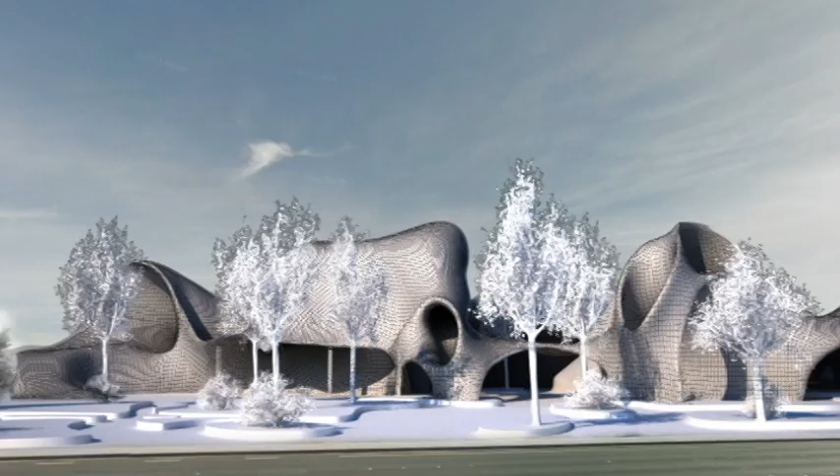Throughout history, architectural advancements have paralleled changing cultural patterns. From the ancient Romans to the 19th century Industrial Revolution, technological advancements and innovative methods of material manipulation have led to new architectural forms. In turn, fabrication processes have been rethought and adapted to such demands.

No longer is the house an engineered reduction of the machine. Factory production is no longer a means to mass-produce standardized components. Now, variation in complexity is just as achievable as repetition.

Society as a whole has departed from the constraints of a single, nearly universal consumption standard and has evolved into the heterogeneous society of the multitude.

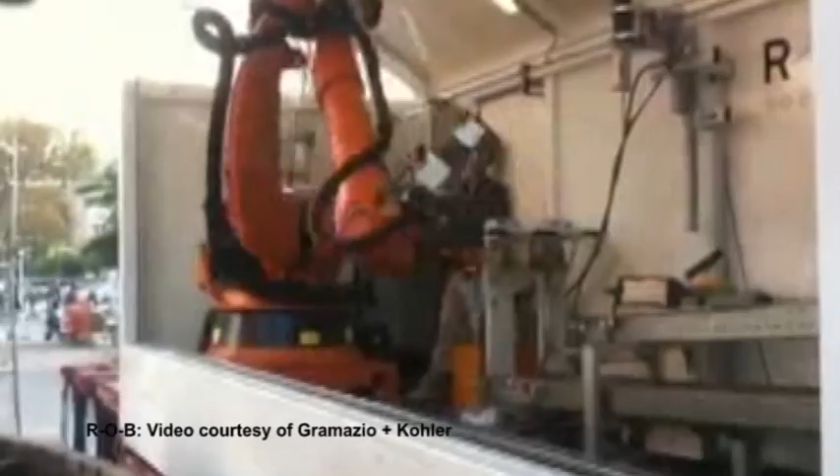Here, design and fabrication are intertwined, whereas design is fabricated and fabrication is designed. The fabrication system is an evolutionary process where form is the formwork.

Differentiation and variation occurs as each panel layer is directly dependent upon the previous one. Digital fabrication offers architects a first-hand experience of gaining explicit control over the fabrication and manufacturing of architecture. Digital fabrication methods make connections between design decisions, material properties, and construction procedures.

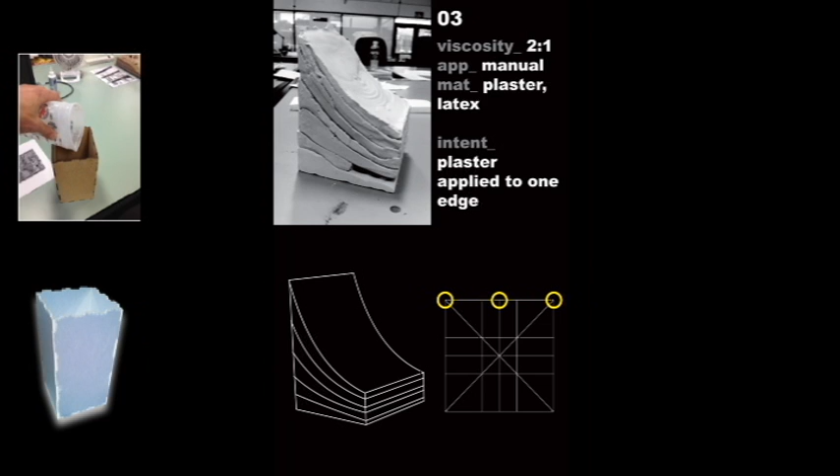Hands-on research through prototyping and evaluation has resulted in a cohesive understanding of material properties, limitations, control, and variables. It is this recursive feedback loop of information, analysis, and reinterpretation that allows emergent behaviors and patterns to become apparent.

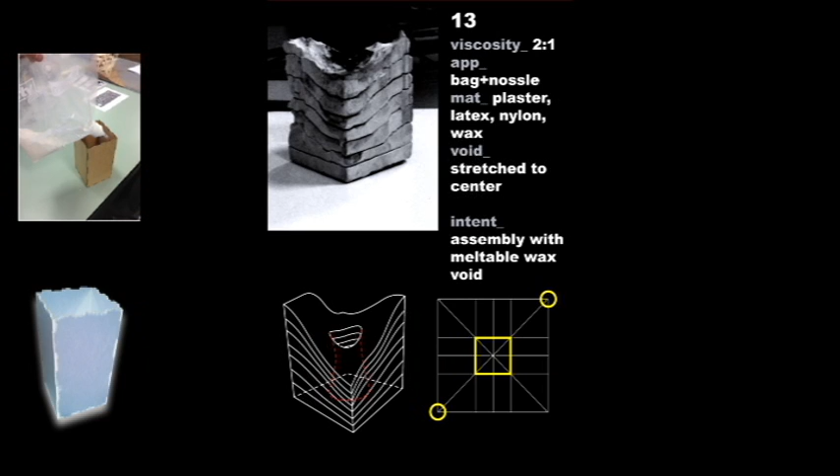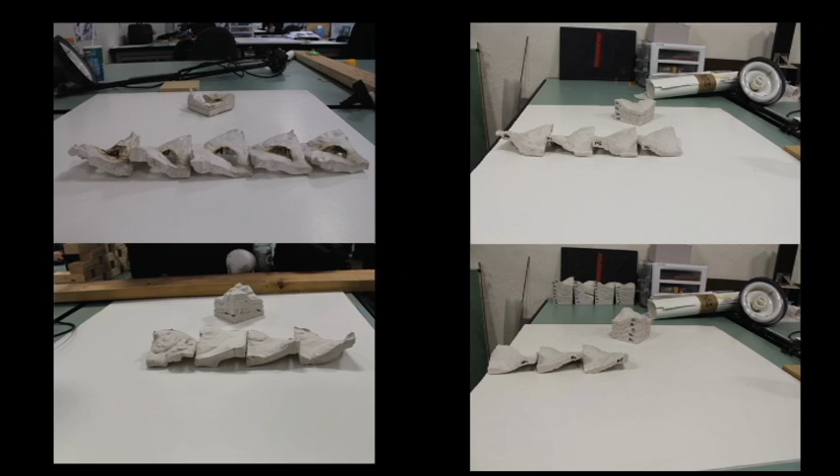A series of geometric investigations reveal the possibilities of connecting successive panels end-to-end for linear assemblages. Prototypes 14, 15, and 18 are assembled in a linear array.

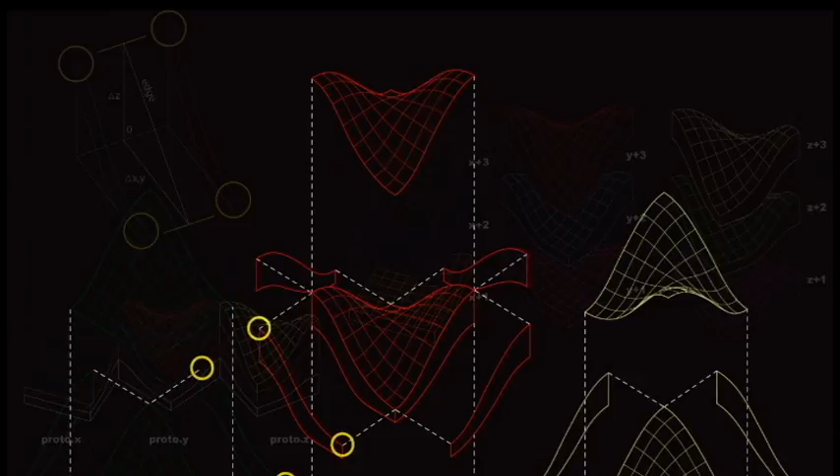Further geometric analysis revealed the specifics of these connections. Distances between shared vertices in the x and y directions are calculated, and the resultant function between the two determines the geometry of a shared edge condition. In order to evaluate this logic, a predetermined surface was reverse engineered into a field of panels.

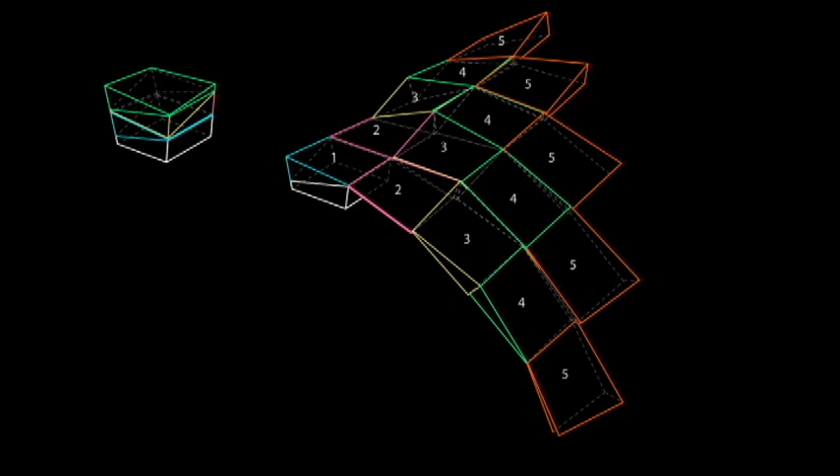Beyond flat surface geometries, the system is capable of creating domes, fully flexible shell structures. Fifteen identical formworks were uniquely etched and cataloged for casting and assembly purposes.

The resultant form demonstrates three-dimensional flexibility. As the S-shape bends in the X and Y direction, the form also tapers inward and outward at the top and bottom, allowing for a self-supportive shell.

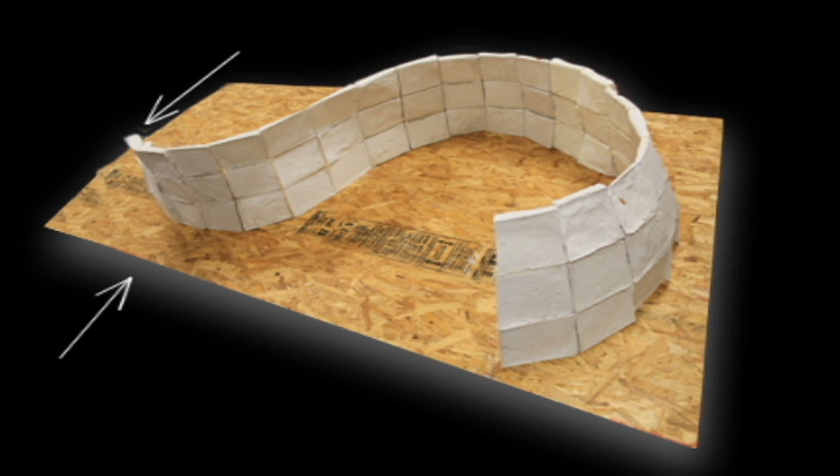Traditionally, individual molds would need to be made for each unique panel. Although sophisticated software today can identify similar geometries on a panelized surface for formwork reuse, stackable fabrication allows the reuse of formwork with the benefit of generating multiple unique panels.

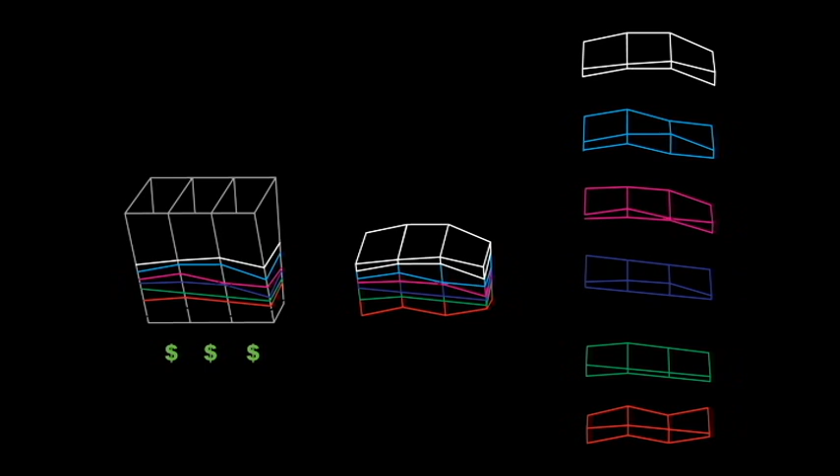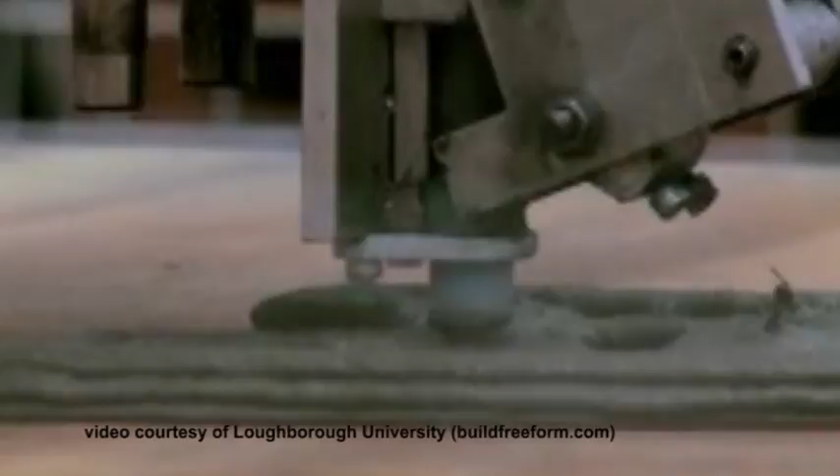Furthermore, we are capable of accessing and modifying the code of our current technologies, such as a CNC router, and instructing it to precisely dispense concrete into the mold through a customized nozzle attachment. This now becomes a deployable system, blurring the line between prefab and cast-on-site fabrication.

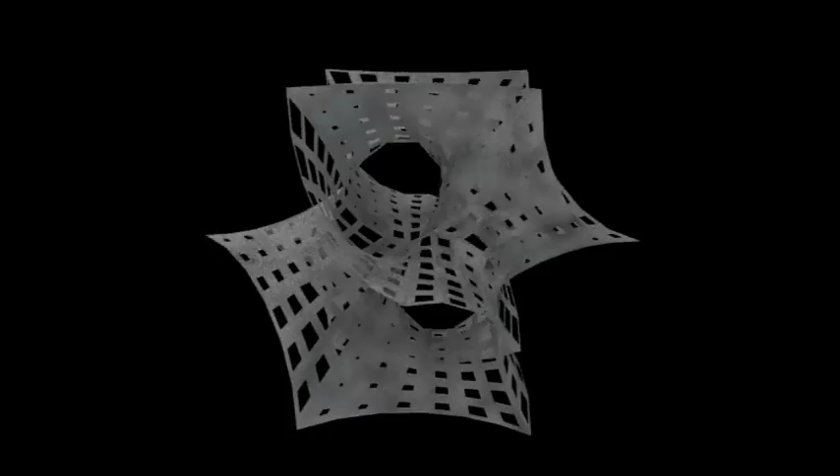The system is infinitely continuous as more and more layers and formworks are added. The properties of this unbounded expandability largely led into an investigation of continuous surfaces. The batwing minimal surface is a mathematically derived differential equation in which surface continuity is bound by a network of curves.

Site-specific aggregation is based on existing automobile, bus, and trolley circulation, as well as pedestrian access from the nearby intersection, bus stop, and from the business park to the south.

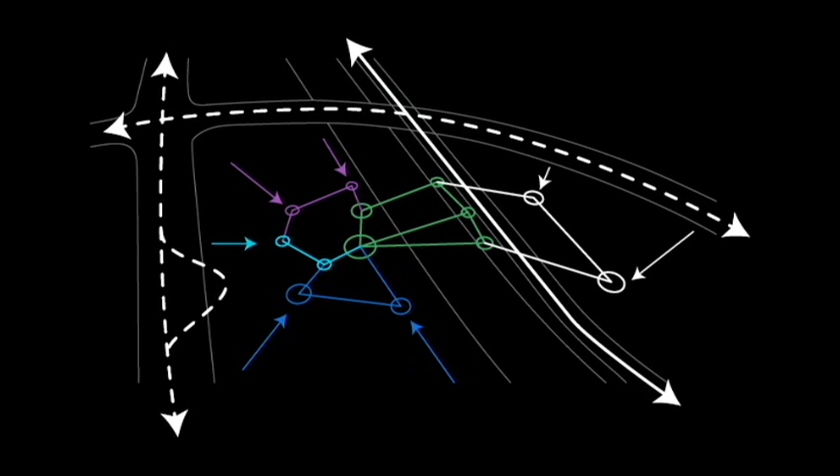Connections between these nodes create complex spatial conditions and circulation routes. These forms not only respond to local conditions, but augment complex social functions inherent in contemporary society.

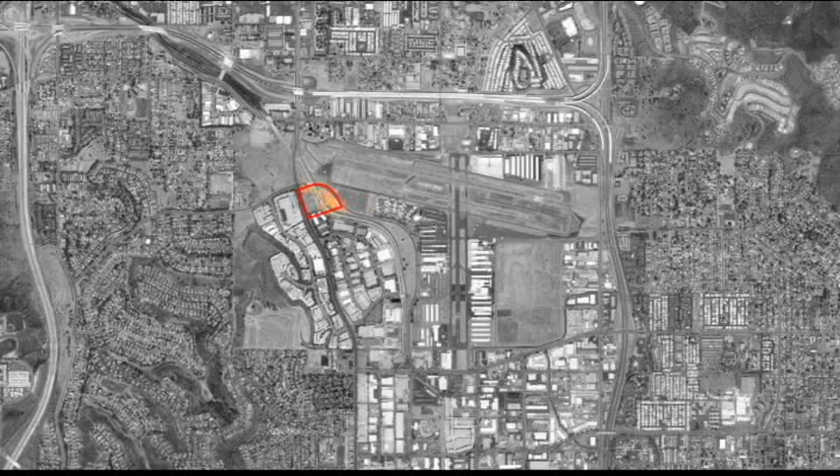The Gillespie Field Trolley Stop is located in South Santee in eastern San Diego County. Two business parks border the trolley station to the north and south, a typical suburban neighborhood to the west, and Gillespie Airfield to the east.

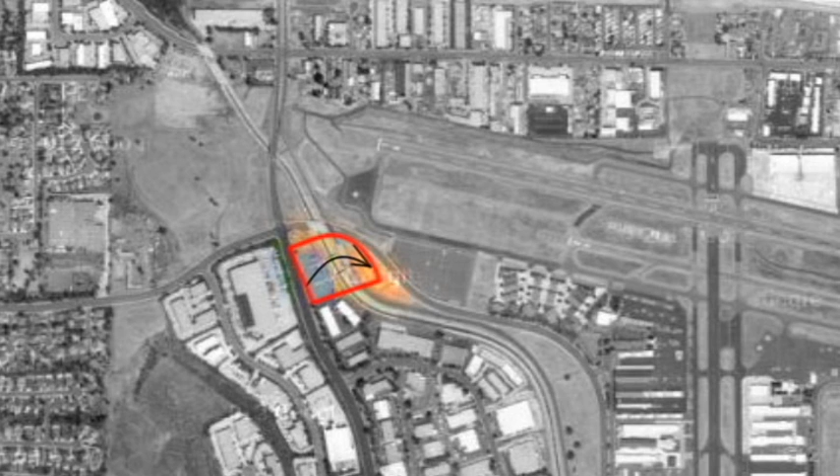The site is bisected by a water basin parallel to the trolley tracks, requiring bridge access from the west. The current trolley stop is a hub for multiple, presently disjointed modes of transportation: bus, bicycle, automobile, pedestrian, and trolley. The trolley station complex integrates all five.

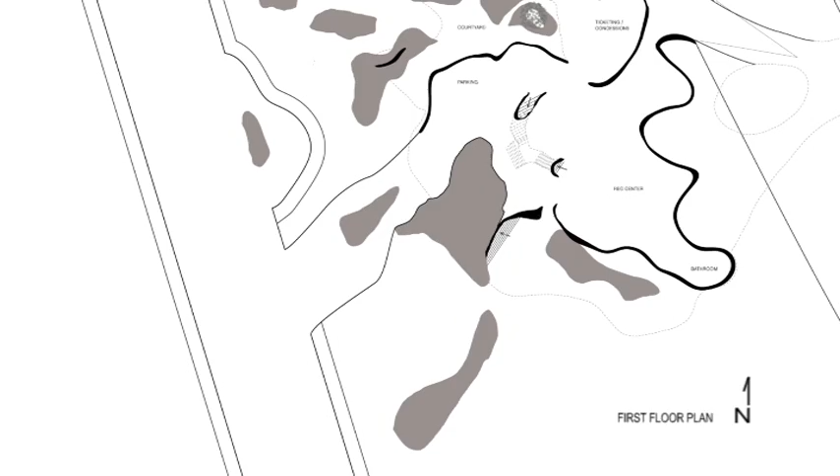Surrounding the complex is a multitude of seating areas and meandering paths. I provided an area on the northwest side for the local Santee Farmers Market on Wednesday afternoons, currently held in this abandoned parking lot. During the rest of the week, the space functions as a covered area for bikers and joggers to take a break. The ramp to the left leads to a covered gift shop above.

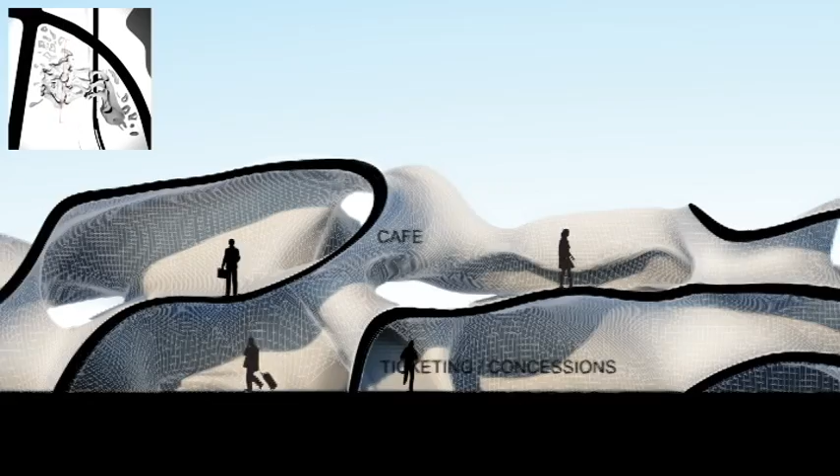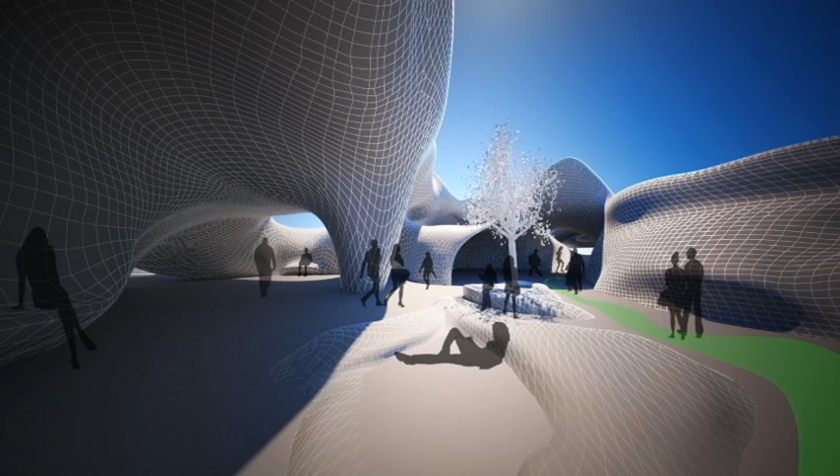Around the corner is the main entrance, leading to an inner courtyard with adjacencies to the ticketing and concession area, covered parking, trolley bridge access, and seating areas above.

By implementing a turnstile element into the San Diego public transportation system, the city will be capable of generating enough capital to fully fund the project as well as more of its kind. The result is an architecturally unified public transportation system with locally adapted programmatic conditions and a source for steady economic gain. Passing through the ticketing area, a ramp leads to the second-level bridges, where there is access to the information kiosk, a secondary trolley access point, and the eastern side of the trolley line.

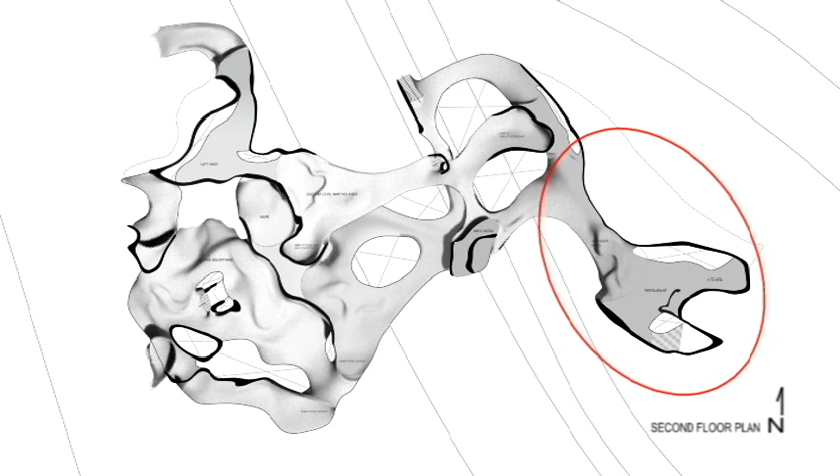The restaurant is separated from trolley service programs as it will primarily serve the general public and daily lunch crowds from the nearby business park and Gillespie Field Aviation School.

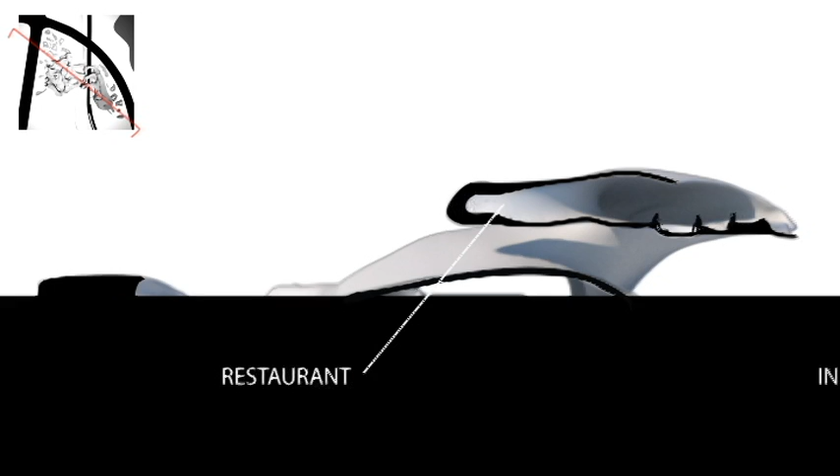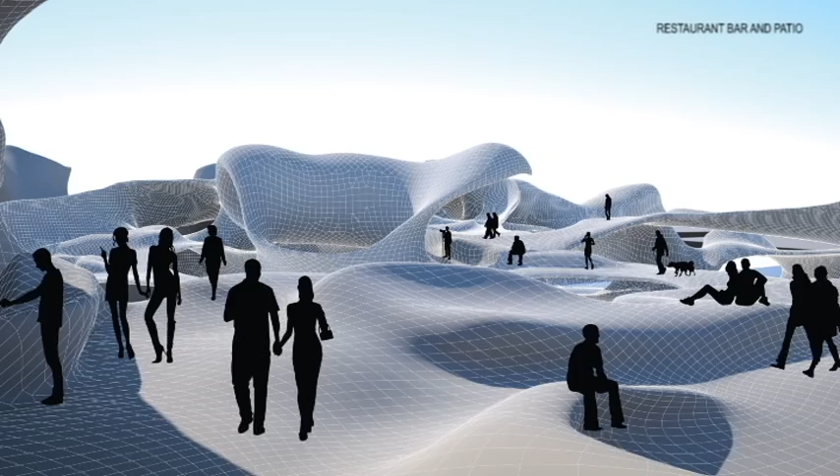This area showcases the ability of the fabrication system to formally integrate terrace seating areas, bar top division, and roof structure. Typically, specialized professionals would be subcontracted for each installation, but now one comprehensive fabrication system allows form to adapt to specific programmatic requirements, effectively putting the designer in full control of spatial manipulation. We are no longer reduced to the constraints of value-engineered spaces that are merely good enough.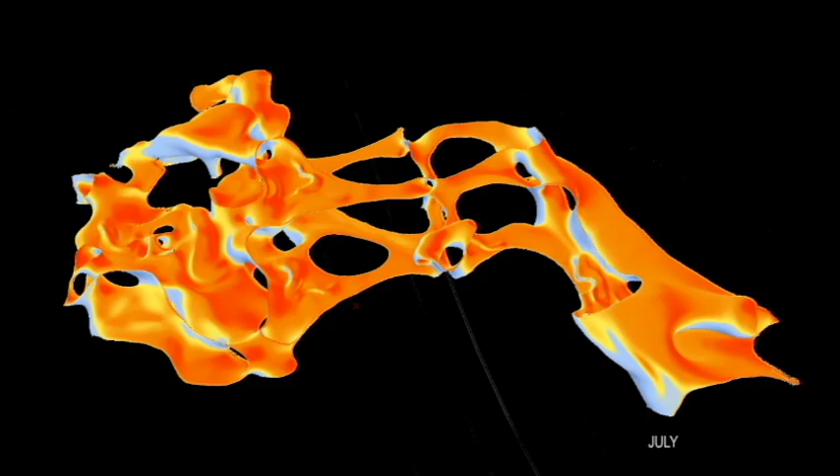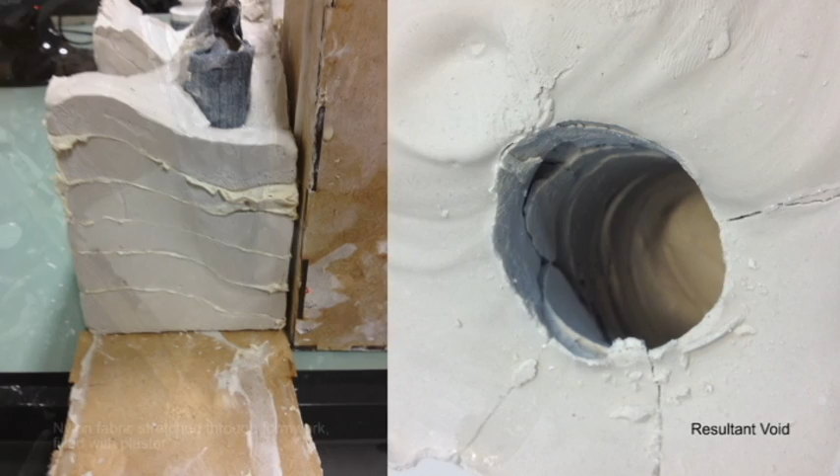A solar analysis script was used to determine optimum surface perforations for daylighting and passive ventilation. Here, adaptive fenestration is applied to the information kiosk, adding another layer of complexity to the final design. These perforations are implemented in the panel's fabrication phase, where form is embedded within the formwork prior to casting. After the material has cured, the void can be removed and the result is a continuous panel differentiation of both overall geometry and aperture size.

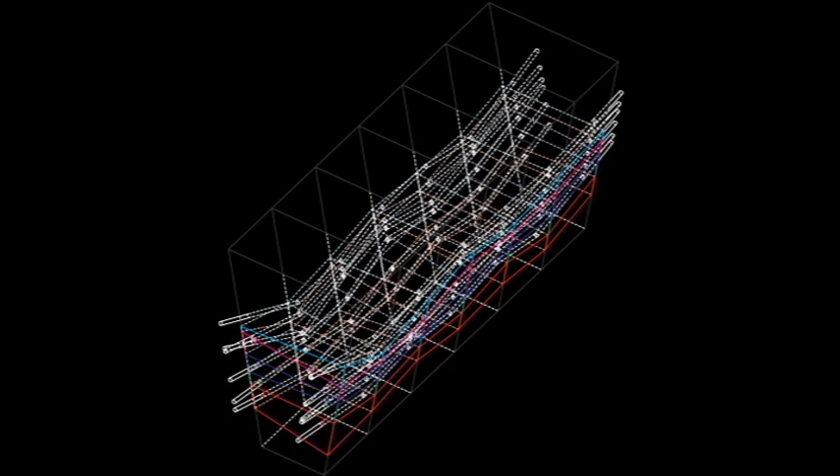The blue areas in the structural diagram highlight areas of weaker structural performance, requiring additional reinforcement. Also applied at the fabrication phase, the formworks are pre-threaded with rebar and cast as usual. Traditionally, precast concrete shell structures can span 18 to 20 feet between columns. Glass fiber reinforced concrete reduces weight while adding tensile properties to the panels. GFRC allows for spans double to triple that of equal weight traditional concrete mixtures.

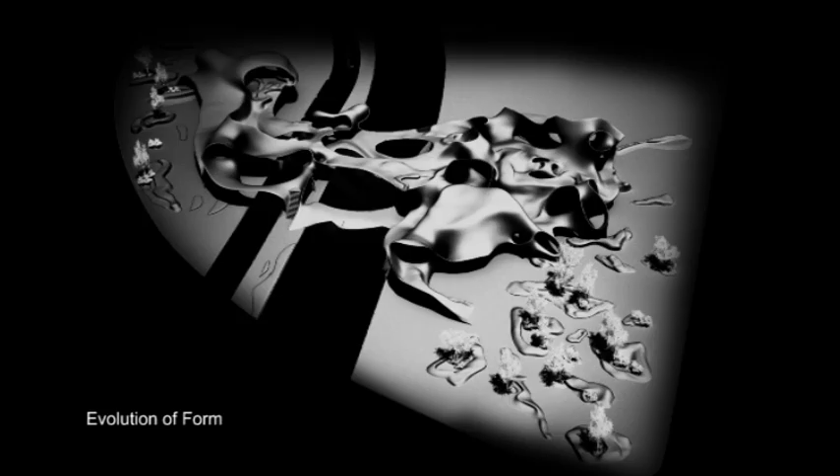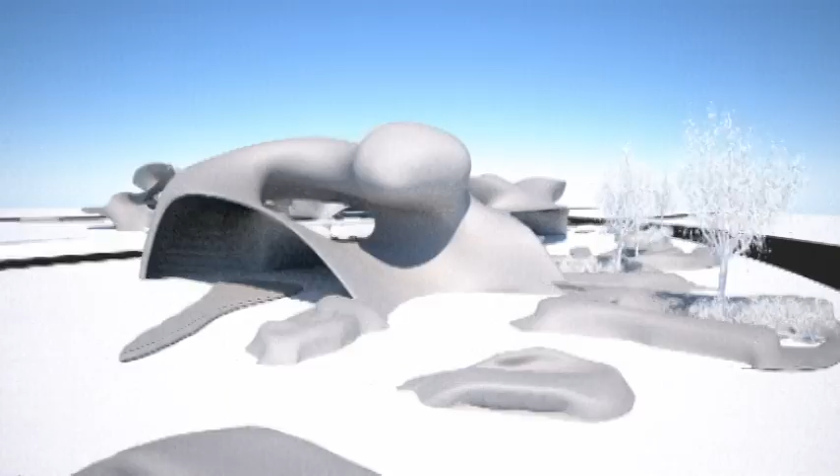From fabrication to realization, the Gillespie Field trolley stop demonstrates the ability of spatial complexities to become integrated into program, site, and production processes, creating moments that rethink modern architectural design techniques. Contemporary architecture is continually informing and being informed by new modes of representation, and thusly the role of the designer is returning to that of the master builder.

Designs are a network of operations between mind, hand, tool, and material. These direct relationships encourage new disciplinary delegations, leading to alternative modes of collaboration among experts. These vast bodies of knowledge between professions are the breeding grounds for new emergent phenomena and allow the scope of architectural design to infinitely progress.